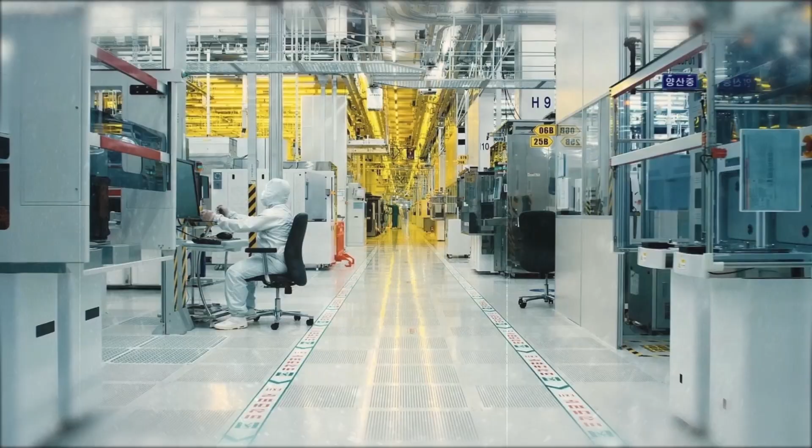Amidst the world's rapidly accelerating changes and competition, what kind of future are you preparing for? We are charting a path to the future through science and technology exchanges, bolstered by international cooperation. In this era, where scientific and technological competitiveness is directly linked to a nation's diplomacy and security, the power to overcome such challenges lies in international cooperation that fosters synergy through collective efforts, and from talents who will shape the forthcoming era.

The scholars of the world are gathering in Korea. A platform that facilitates exchanges between Korean and international scholars, as well as between seasoned and emerging researchers, is taking shape. BrainLink X-Lab Day, organized by the Korean Federation of Science and Technology Societies, aims to be a global hub of talent.

By consistently enhancing and expanding the global talent network, we're laying the groundwork for a brighter future. By inviting global scholars, X-Lab Day provides an opportunity for young Korean researchers to glean insights from the vast knowledge and experience of both Korean and international scholars, as well as to engage in collaborative research.

BrainLink X-Lab Day establishes a global science and technology network among overseas scholars and Korean researchers. In 2022 and 2023, a total of 24 BrainLink X-Lab Day sessions were held in each technical field, with 787 participants, including 161 from overseas and 626 from Korea, building a global human network.

Also, talk concerts, one-day public seminars, were held in collaboration with the 2 nights and 3 days of BrainLink X-Lab Day to enrich their experience.

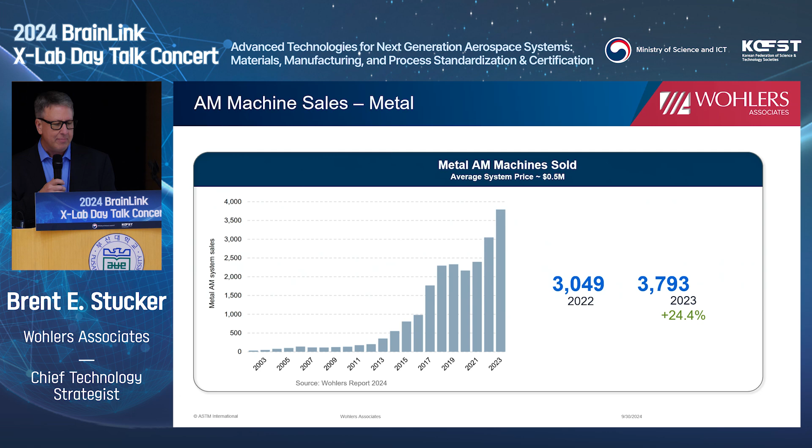If we look at material sales in additive manufacturing, that continues to go up and up, because the more your install base, even if you're not growing it as fast, as long as they're using those machines, they have to consume materials. So materials continue to be a strong area to think about for research and for building businesses.

If you think about the various amounts of material sold, polymer powders still tend to dominate - that's polymer laser sintering primarily. Then you've got filaments for things like material extrusion, FDM type processes, photopolymers, and metals are about the same now. So we have a pretty healthy mix of different materials out there. What's interesting to me is that polymer powders are an area you don't hear a lot about in the research community, because people tend to just use a lot of nylon.

But there is an opportunity - a lot of material goes through all these polymer laser sintering machines or multi-jet fusion machines from HP. It continues to be an area where we need more innovation, and there's actually money to be made. There's quite a bit of money being spent on polymer powders, but not a lot of innovation going on in that area.

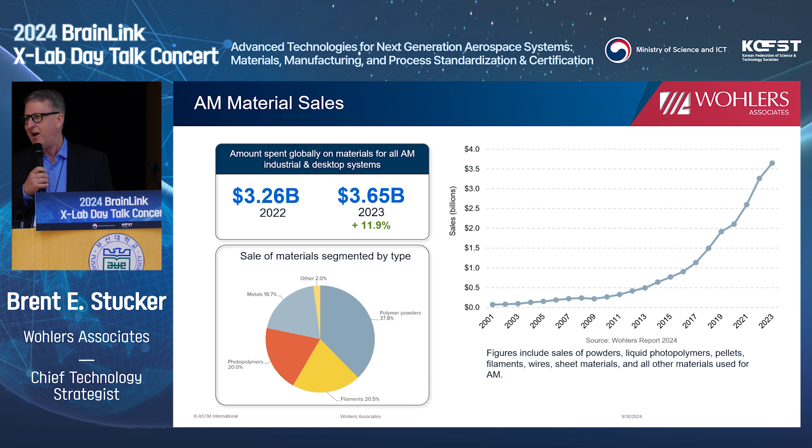Next, I'd like to talk about how people are using all these parts they've been making on additive manufacturing or 3D printing machines. The biggest category is now end-use parts - they're producing components going into aircraft, automobiles, satellites, shoes, or dental applications - though the dental ones are usually molds - and hearing aids.

End-use parts are now almost a third. If you combine that with metal tooling, patterns, jigs and fixtures, you see all those applications are actually producing the thing you want - not using it as a pattern or a prototype. Over the last couple of years, what 3D printing was initially primarily used for - prototyping, getting the right shape, seeing how it looked and felt - we've shifted as an industry where the majority of our revenue is now producing a finished good we want to use. Mostly we use it for the part, but sometimes as a mold or a fixture. It's been a pretty major shift, actually.

That shift occurred right about during COVID, where we went from more prototyping to less prototyping just in the last few years.

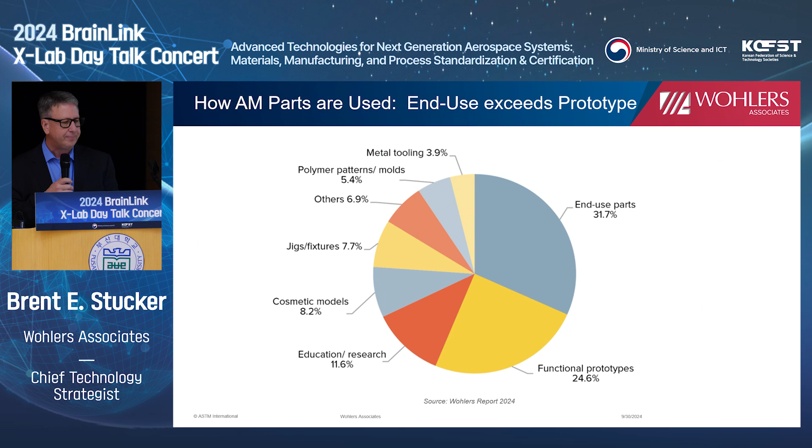Just to give you a little bit of where we're getting this data, we send out a bunch of surveys and work with a lot of service providers. We had over 113 different service providers respond. Service providers mostly build parts for other people, they buy additive manufacturing machines and make parts. We also had over 115 system manufacturers respond to the survey. That's kind of where we get our data, as a collection of that information.

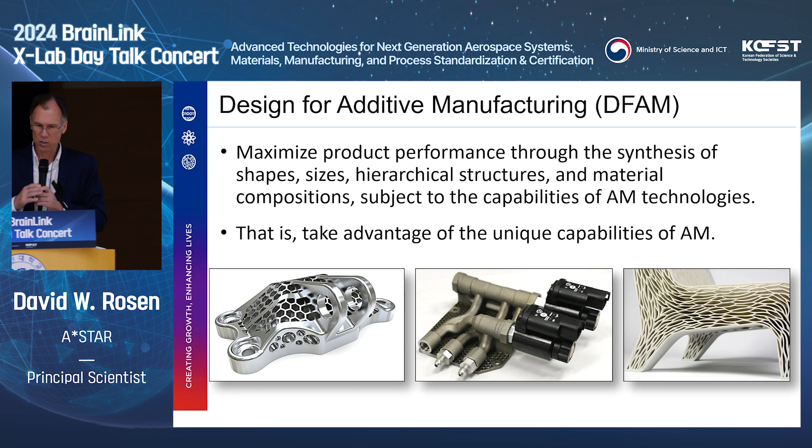So I tend to say we want to take advantage of the unique capabilities of additive. And we need to integrate a lot of different technologies, technology ideas, process ideas, material characteristics, etc. All right, take advantage of the unique capabilities.

So what are they? Well, of course, we can make just about any shape. So shape complexity is the big one here. With additive, you fabricate parts layer by layer, adding and processing material like that. Lasers, if you're using lasers, the laser doesn't care what pattern it's tracing. If you're using an FDM or a material extrusion kind of printer, the nozzle, the extrusion head doesn't really care what kind of pattern you're putting there. So you can make just about any shape.

And because you can do that, you can also make custom shapes. So hearing aids, aligners, dental aligners, dentures, things like that, they can be custom fitted to the particular patient. So shape can be customized, so can material composition in a lot of cases. So material complexity is also possible.

Hierarchical complexity is related to shape complexity. Think of adding tiny little fins or texture to lattice structure to promote heat transfer, for example. And then finally, functional complexity.

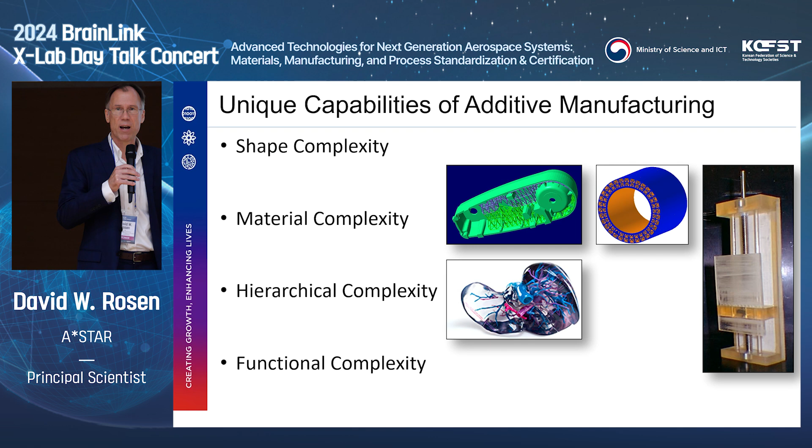In a lot of cases, we can make mechanisms, we can make assemblies right in the machine without post-fabrication assembly. A lot of times we can insert metal components or other kinds of components into the vat or into the powder bed or into the part as you're building it to make functional devices.

All right, so we want to be able to take advantage of that. Dr. Stucker mentioned fuel nozzles of GE engines. There's a picture of one of those. At least that's the picture that GE gives us.

So complex geometries, we can see that's a spinal implant right in the middle. Stryker makes hundreds of thousands of those per year and implants them in people. Hearing aid shells, dental aligners.

You can actually buy American football helmets with vat photopolymerization fabricated foams like that, and those are also custom fitted to the individual player. So we see a lot of examples of complex geometry, custom geometry, designing parts that you can't easily fabricate using conventional technologies.

I like to wrap all this up into some opportunities and some consequences of those opportunities. So again, complex geometry, custom geometry, multiple materials, no tooling, things like that.

So complex geometry, custom geometry, we can do part consolidation. That's one of the real successes of the fuel nozzle from GE. You integrate 19 or 20 parts into one. You save tremendous assembly and welding and brazing costs.

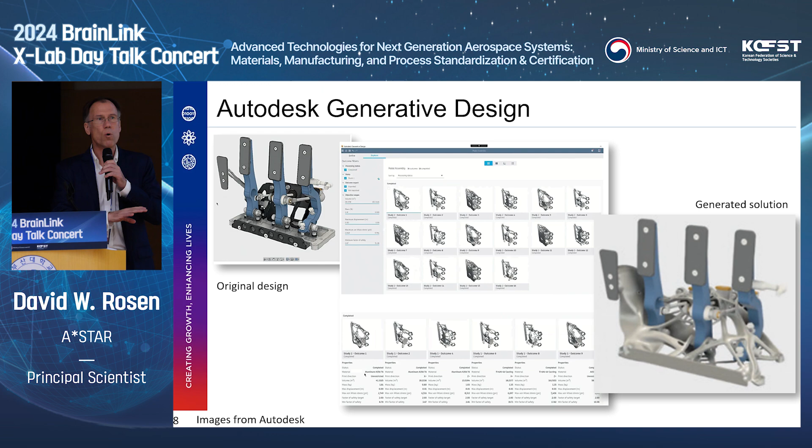Identify a few designs that you want to go further with, and then ultimately settle on one, and do additional engineering work to come up with your final design. This is a really good example of taking advantage of the shape complexity capabilities of additive, but it's only one approach here.

Let me move on and talk about the first of the topics that represents the frontier, which is this whole idea of a manufacturing process chain, not a single manufacturing process, and the need to design for that manufacturing process chain.

In metal additive in particular, you make a part, and for metal powder bed fusion, this is what the part looks like on the build platform with all the other test specimens built along with it. That's not the final part. The final part, in this case a hydraulic manifold, has to interface with standard hydraulic components. There's a heat treatment, you need to remove the support structure, remove the part from the build platform, do finished machining, probably bead blasting—a whole series of manufacturing processes.

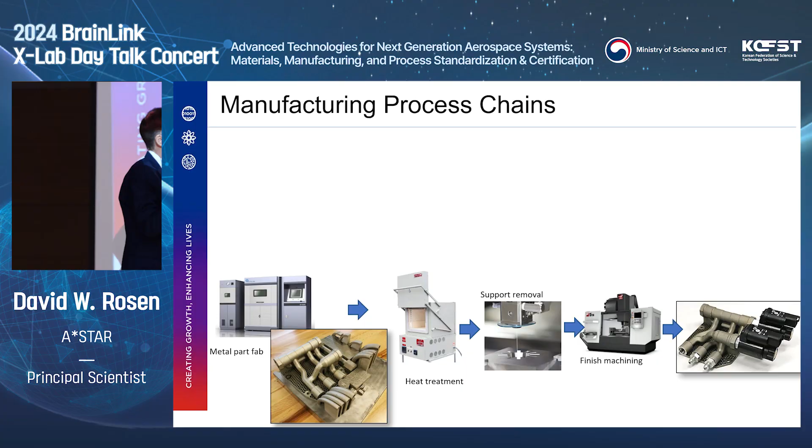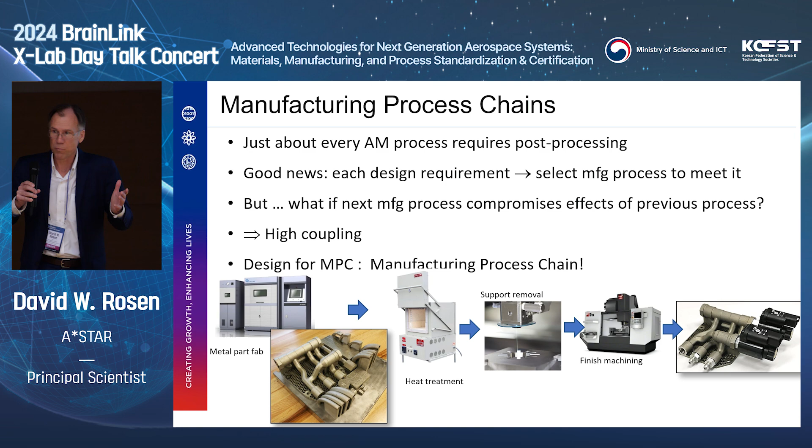So designing for the first process isn't sufficient, because the characteristics of your final part are influenced by all the other manufacturing processes along the way. You want to design for additive, but you've got to design for the whole process chain. Coming up with a process chain is, to some extent, straightforward, but there can be a lot of variations. Some cases you may need additional finishing operations, in some cases you may not. So there's a lot of engineering that goes on there.

From a design for additive standpoint, you need to design for not just the final part characteristics, but really understand what each and every process does to that in-process part, and make sure you're designing the part and the process to give you the characteristics that you want and need.

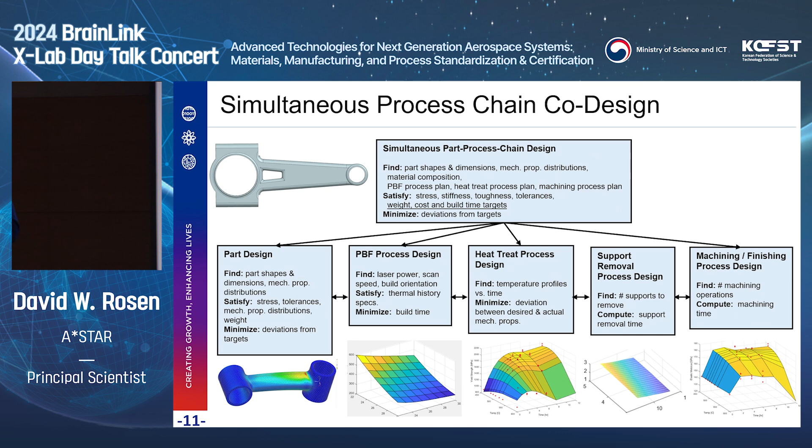So what I'm illustrating here is the formulation of a multi-objective design optimization problem, decomposing that overall problem—design for the process chain—into subsystems, where one subsystem represents the part and all the other subsystems represent the major processes applied to that part. You design the part, but also have to design the powder bed fusion process to get the right mechanical properties. Then you do heat treatment to adjust those properties and get a more homogeneous distribution, remove supports, do finished machining, etc. Each of these processes has to be designed, and you can't compromise functional performance.

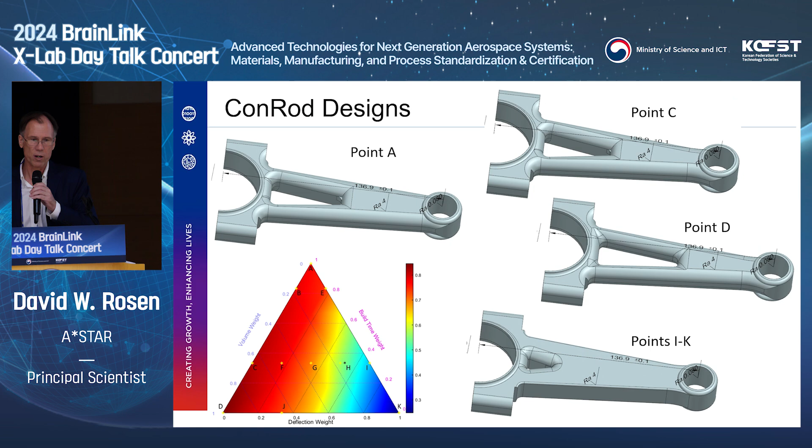We've done a few studies along these lines. This is one example: an automotive connecting rod, showing our approach to what generative design would look like, in the sense that we've defined a design space with both part characteristics and process characteristics, and designed those processes. Different points in our design space represent considerably different designs. They all satisfy the requirements to some extent, but depending on your preferences—do you prefer something really strong and stiff, or lighter weight but less stiff—you get different solutions. We can formulate and solve those big multidisciplinary design optimization problems and help people understand the trade-offs between these processes and the functional requirements.

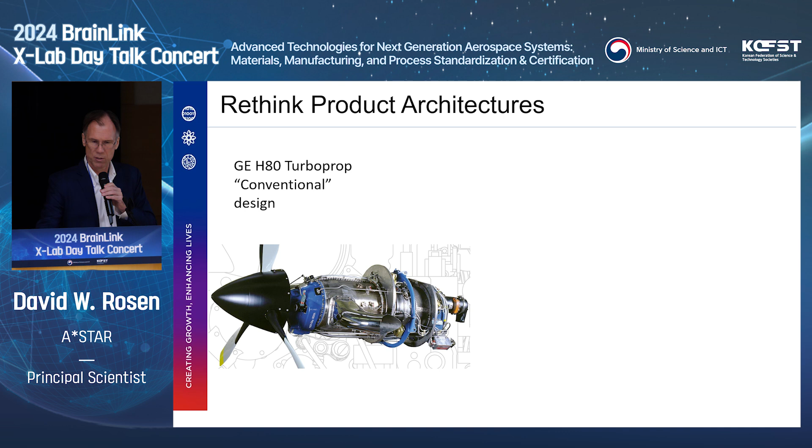Product architecture design—here's another example from the aerospace industry, from GE as well. Here's the conventionally designed turboprop engine, and here's an engine that GE redesigned to make the most use of metal additive that they can. What they claim is that they went from about 850 conventionally manufactured parts down to 11. Now, I see more than 11 parts there, but I think it's the main structures and things like that that count as the 11. So it's a tremendous part consolidation.

Fabricating far, far fewer parts. Each part is going to be much more complex, and that has a huge impact on the factory floor, a huge impact on the supply base, and greatly simplifies the factory floor. Plus you get reduced fuel burn, so better economy, more power, etc. So there's lots and lots of advantages.

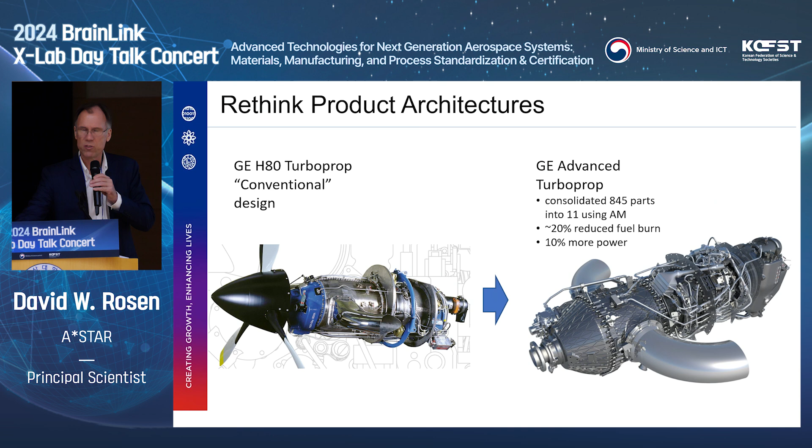But you don't get there by tweaking some dimensions or tweaking designs. You do it by doing clean sheet design—really saying never mind how we've designed and developed engines, what they've looked like in the past. We need to totally rethink these things.

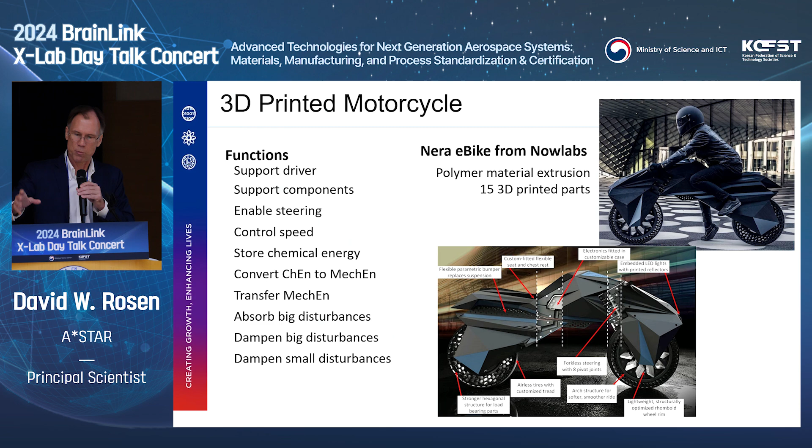Another thing you'll notice is there are no separate suspension components. A typical suspension on a motorcycle is shock absorbers and springs and things like that. But the whole structure deforms, there's also a bumper underneath the seat, and the seat is an elastomer material that's printed. So, not so obvious in terms of this overall suspension, but certainly with a polymer frame there will be some compliance there.

The point is that you can think methodically about the functions and about how you're going to divide up the geometry into different components, into different subsystems, and look for opportunities to do function sharing and function integration. If we can integrate what the transmission does, we eliminate the transmission, and we save a lot in terms of simplifying the overall product architecture.

So we won't go through the details, just this notion that just because something has looked like the motorcycle on the left for 100 years doesn't mean motorcycles have to look like that. In fact, in the context of design for additive, that electric bike consists of, I think, 15 3D printed parts, including the tires, the wheels, the seat, and the frame. So, tremendous change in product architecture.

Assuming I still have some time, the last thing I'll talk about real quickly is 4D printing. I think this is a really interesting area, a lot of possibilities, though still very early in the technology development cycle. 4D printing is basically using the shape memory effect. The fourth dimension, of course, is time, so the shape changes over time.

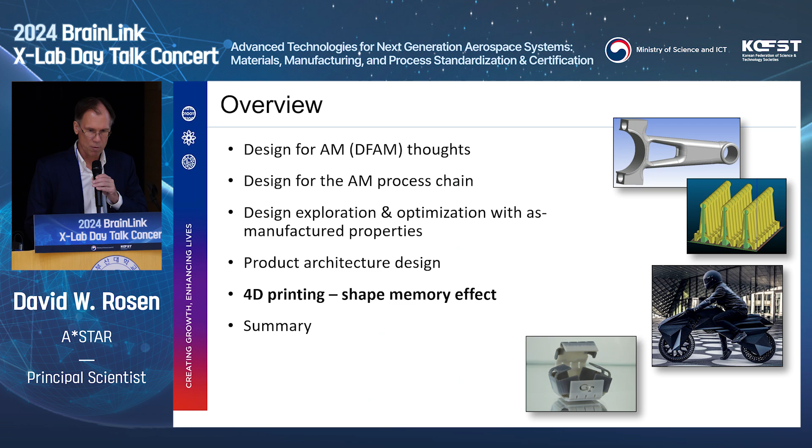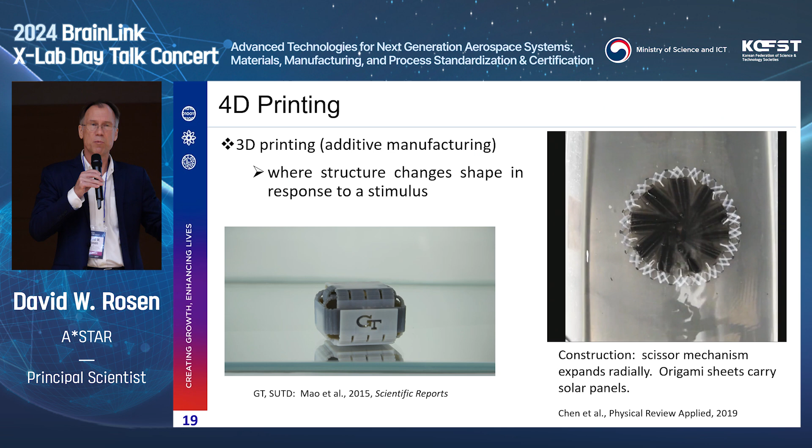In the shape memory effect, a lot of times you use heat as a stimulus. You have a part at room temperature, it has one shape; you heat it up, it changes shape. An example of that, two examples, are shown here. These parts, or a product, are being put into a hot water bath, which stimulates that shape change.

In one case, the part folds up from a flat printed part into a box. In the other, scissor mechanisms are the actuators—the plastic white scissor mechanisms around the periphery—and they open up that solar panel deployment mechanism and unfold the origami solar panel constructions.

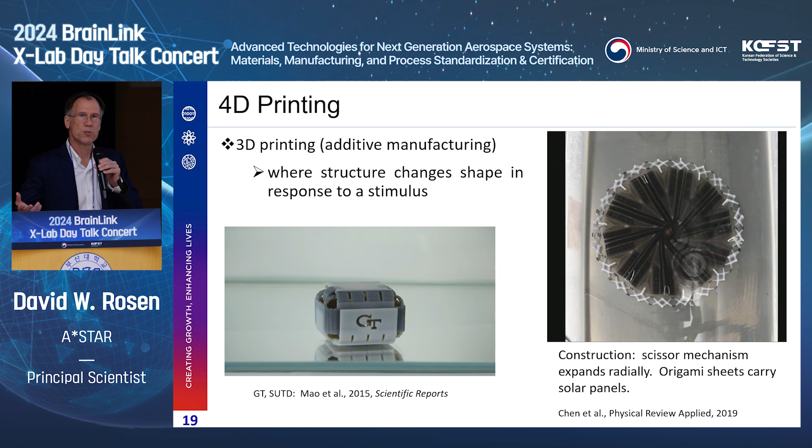And so that's 4D printing in a nutshell, right? You can print in one shape and deploy in a different shape, have things go back and forth. What are the design opportunities? In my mind, this is the big picture: these are essentially solid state actuators. You can print them, and they can power mechanisms that deploy, that change shape, etc.

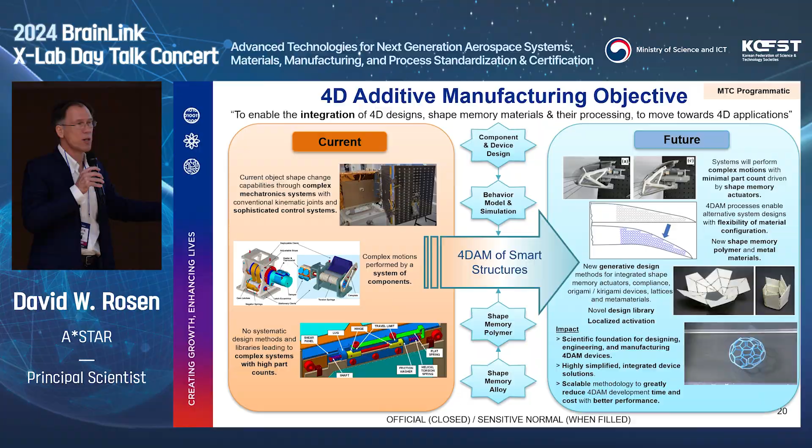How do you implement those sorts of functionalities conventionally? Well, they're called mechatronic systems—using a lot of servo motors, servo motor controllers, a lot of sensors, shafts, bushings, bearings, washers, fasteners, and things like that. Many of those components can be eliminated if you can design good shape memory actuators. I won't go through all the details, but that's kind of the story there.

So we now have a new project at A*STAR in Singapore on 4D printing, and a big part of that is design for 4D printing. The idea is to make progress toward using the shape memory effect to develop actuators for systems that deploy and change shape. We can think about all these different components that people have developed over the years, and put those components together in novel ways to do very different deployment and morphing or shape change activities.

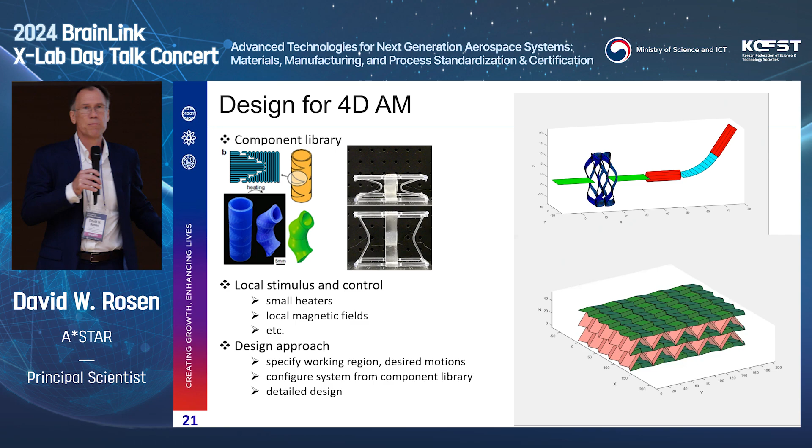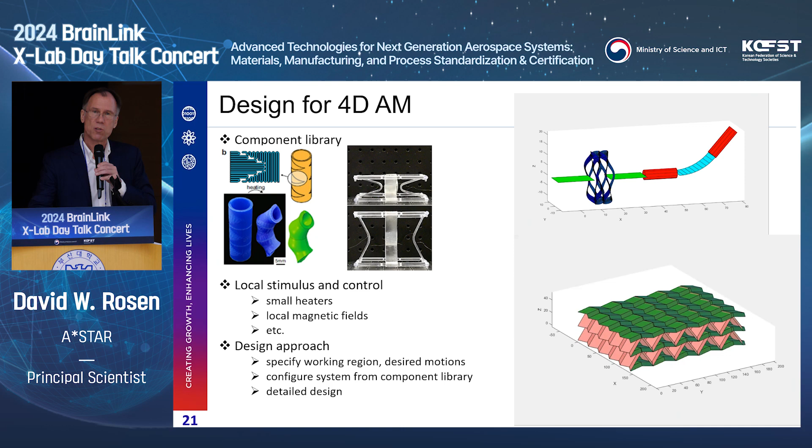So up on the top there is just something that deploys, it extends, it bends, and down here is an origami construct that changes shape, just to give you an idea that you can get a lot of different kinds of constructs, put them together in different ways, and achieve functionalities that really haven't been explored before, haven't had the ability to explore.

So I'll wrap up here. Summary: I wanted to introduce this notion of design for additive manufacturing as an opportunistic design process, not just this kind of constrained, restrictive process of tweaking things. Designing for the additive manufacturing process chain is a very important consideration, and there are good ways to establish that process chain and then design the part and the product for it.

I talked about rethinking product architectures, essentially thinking of new ways of organizing the way products are built and thought of. And then finally, I introduced design for 4D printing, and tried to identify some challenges and opportunities in each of those areas. Hope you found that interesting, and that'll conclude my talk. Thank you for your attention.

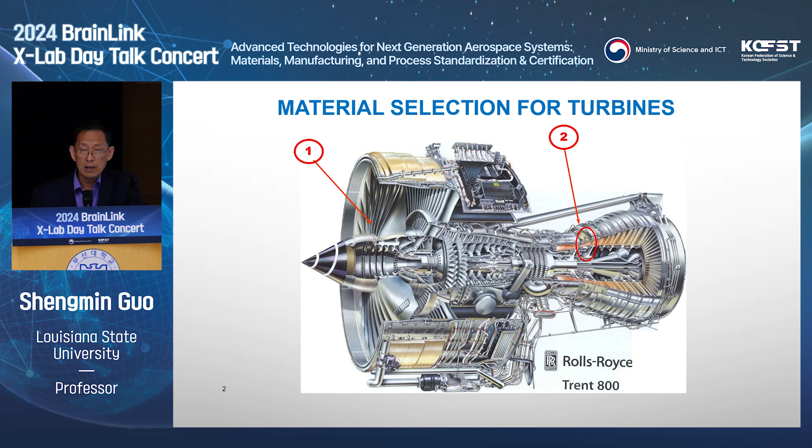For aerospace application, it's very important to consider both material design, fabrication, and the thermofluid cooling technique. So typically for the high pressure turbine blade, you can see it right here. There are several technologies. Material development is one thing. Over the years we've had the development of super alloys, and now you can find a single crystal blade - the entire blade made of single crystal, nickel-based super alloy.

But even with nickel-based super alloy material, it will not survive jet engine working conditions because the temperature is so high. Nickel-based super alloy single crystal will melt and lose mechanical strength very quickly. So what you'll find, in order to safeguard jet engine components, is that you have to add a ceramic layer on the surface to provide a so-called thermal barrier coating. And inside, we have to think of introducing cooling jets, using cooling gas to provide cooling, to make sure all the engine hardware doesn't exceed the allowed temperature.

The nickel-based super alloy, even the single crystal one, has a maximum temperature probably less than 1,000 degrees C. That apparently is not hot enough to operate a jet engine. So the idea is: near the wall, make sure the temperature is at or below 1,000 degrees C; away from the wall, you want the temperature as high as possible. Jet engine components are made of very expensive material.

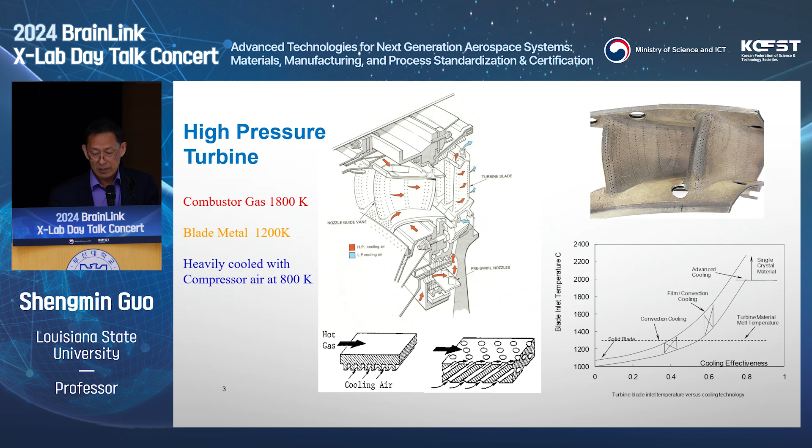At the moment, you may find that metal-based 3D printing people are talking about doing repair work. I really don't see the immediate application of using 3D printing to fabricate the entire high-pressure turbine blades, because with turbine blades you have to make sure the growth of the grain along a certain direction gives you the maximum strength.

For temperature control, I want to find out what's the temperature distribution in the engineering part we are going to fabricate, including 3D printed parts. In order to find the temperature distribution, you need to understand the flow condition. For example, for the engine components, find out what is the hot gas temperature, find out what is the heat transfer coefficient for the high-speed flow around the jet engine components. You also need to know inside the cooling gas, what's the pressure, what's the temperature, what's the heat transfer coefficient, etc. Is that enough? No.

We still need additional information. We need to find out what's the thermal property of the material you're going to use to form the jet engine components. Let's say the engine blade is made of nickel-based superalloy. What's the thermal diffusivity, thermal conductivity, those basic thermal properties. And on the surface of the nickel-based superalloy will be coated with a ceramic layer, let's say to stabilized zirconia. And then that's a question, what's the thermal properties for those ceramic layers?

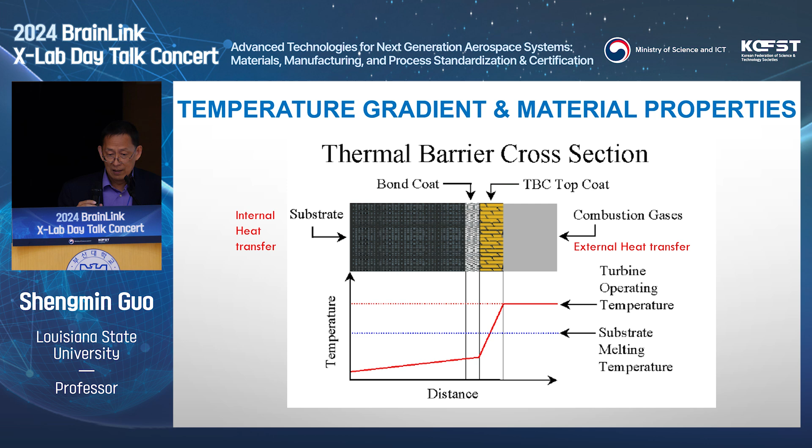Therefore, you have to understand all those thermal properties to enable you to predict what's the final temperature distribution inside a very simple, I'm saying very simple, jet engine, let's say first stage nozzle guide vane, or the first stage turbine blade. Talking about the fabrication, because the topic today is on the materials, additive manufacturing, and the thermal properties.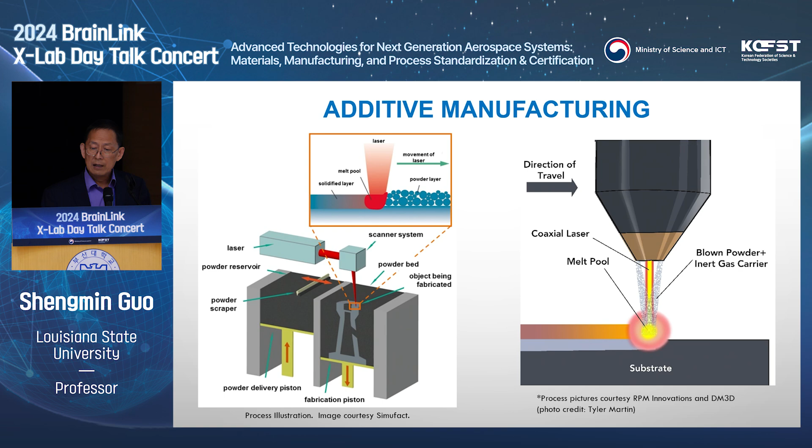For metal-based additive manufacturing, laser powder bed on the left-hand side and direct energy deposition on the right-hand side are very common fabrication technologies. And in fact, I have long-term collaboration with NASA. Look at all those components NASA already fabricated using additive manufacturing for the propulsion application. You see the nozzles.

NASA did a fire test. I assume, look at the color, you will know the temperature probably over 1,200 degrees C, just look at the color of the material. Ask yourself, what material to use to fabricate it, and how are you going to safeguard your entire rocket engine operate under such high temperature, under such high load.

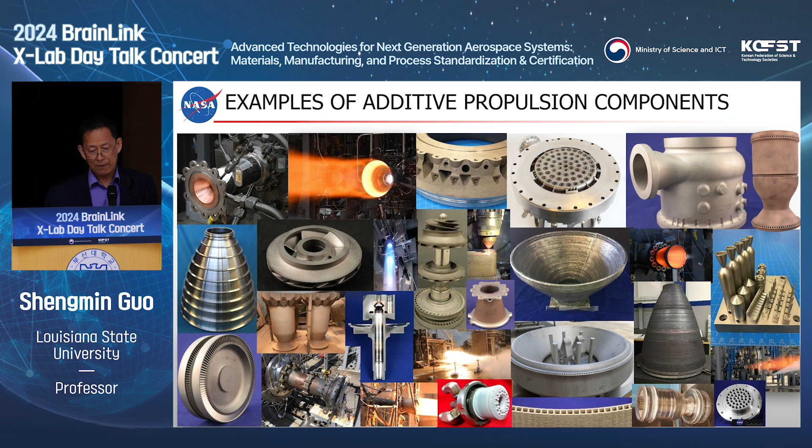For the last few years, I tested different 3D printed materials supplied by NASA. We wrote a book together several years back, called Metal Additive Manufacturing for Propulsion Applications. My group contributed to the thermal property measurements you will find in the appendix of that book. So just to show you a list of materials we tested, pretty much every single material NASA applied additive manufacturing to, they send the material to my lab. We will find out what's the thermal conductivity, thermal diffusivity as a function of temperature. We are going to test those 3D printed materials' thermal properties all the way to the working temperature, not just from room temperature.

Very strange, look at the rocket engine combustor and the nozzle. Look at the right-hand side, that's a 3D printed rocket engine nozzle. Inside the combustor, you burn the fuel with air, let's say hydrogen reacting with oxygen, will generate a temperature maybe over 2,000 degrees C. What kind of material are you going to use to safeguard the structure of the rocket engine nozzle and the combustor chamber? Definitely nickel-based superalloy will not be adequate.

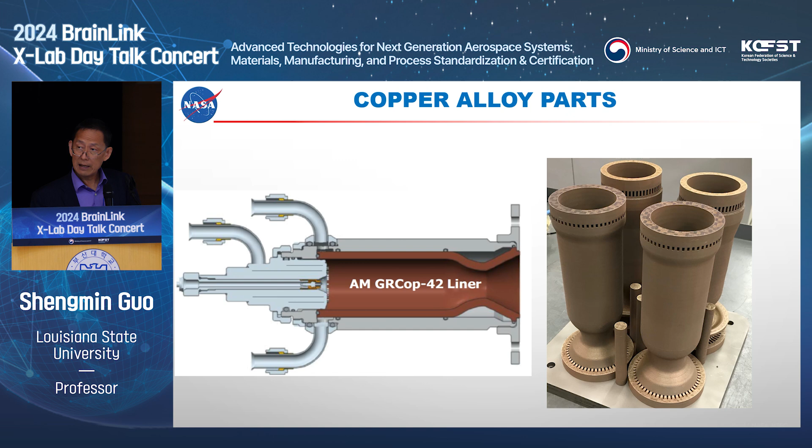My contribution in that book published by NASA is to obtain all those thermal properties of AM parts working over different temperature ranges. Look at pure copper—it gives you the highest thermal conductivity, so it can take heat away.

However, pure copper is not strong enough. When you heat it up to a slightly elevated temperature, the copper will lose strength.

The goal of this NASA copper alloy GRCop-42/84 design is to find copper alloys that give good mechanical strength at elevated temperatures. We know the melting point of copper is around 1000 degrees C. Nobody can operate there because it will melt. Pure copper, when heated, becomes very soft and won't sustain the high pressure inside the combustor.

You may ask, how about adding alloy elements to make it stronger? Yes, NASA thought about this many years ago. For example, one copper alloy is 99.8% pure copper plus maybe 0.1 to 0.2% zirconium. That sounds like a good option, giving good thermal conductivity, but the mechanical strength is not good enough.

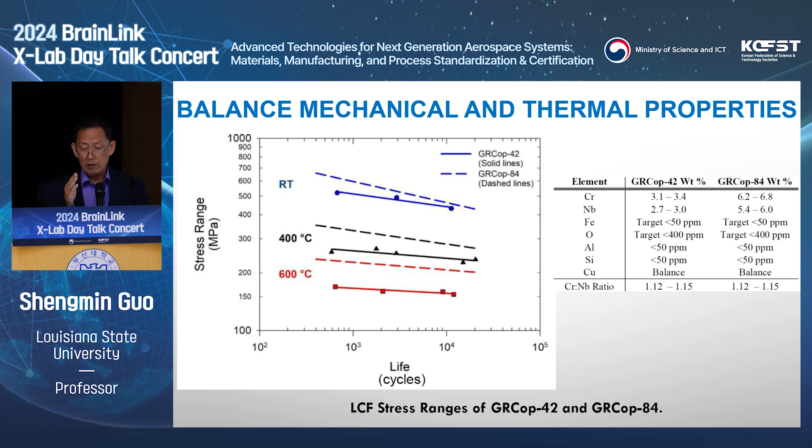Due to the selection of material utilizing additive manufacturing technology, we can incorporate a very complex cooling design into your parts. That's the message I want to pass on today.

Well, somehow this video won't play. Okay, I guess we want to play.

I will stop here. The conclusion is: when you design for additive manufacturing, select your material properly, consider your engineering application, the required temperature range, and the required stress level. Additive manufacturing will then enable you to implement very complex designs into your part, including cooling configurations for engineering applications.

Of course, more studies need to be applied to AM parts because you're using a new alloy. For example, NASA wants to find out, for GRCop-42 or 84, whether the 3D printed part gives the same mechanical or thermal property as parts fabricated by conventional methods like forging or extrusion. They want to see the difference because 3D printing, especially laser powder bed and direct energy deposition, gives a very fast cooling rate, resulting in a unique microstructure.

Those unique microstructures very likely will impact the thermophysical properties—thermal conductivity, diffusivity. They are a strong function of microstructure. Once you change the microstructure, the thermal properties will change as well.

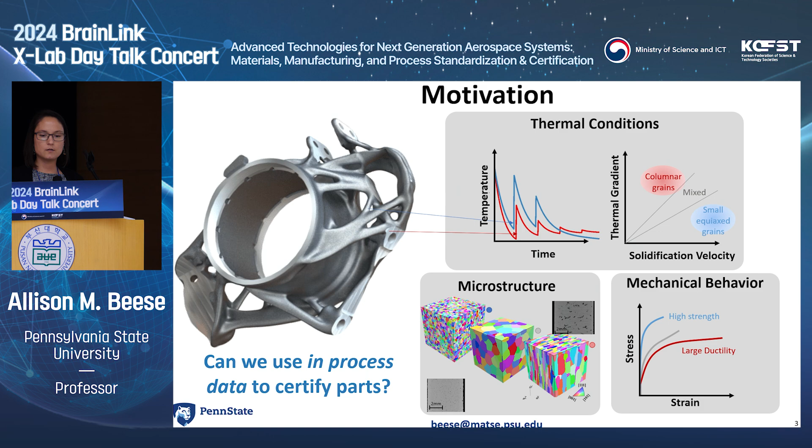And the idea here is that we would not intentionally process in these different regimes, but depending on the design of our component, we may enter one of these thermal conditions. So we want to understand: are there things that we can do during the process that we could recognize that we've gone into one of these regions?

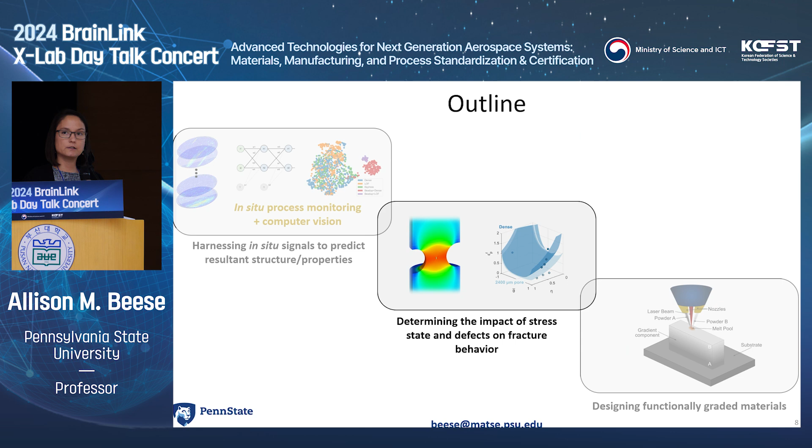Okay, so that was for uniaxial tension, but in actual additive manufacturing, we're interested in complex shaped components. So I'm going to talk about what if we have complex shaped components - how do we predict failure in these parts? These are a number of different geometries we could see, where I'm just going to describe two things to get us on the same page in terms of stress state.

We can define our stress state as our stress triaxiality, which is just the negative pressure of our stress state. So if we have a high stress triaxiality, it's going to want to pull open pores in our sample. And our normalized Lode angle parameter theta bar tells us about the second principal stress. It's a little convoluted, but it tells us the importance of shear, for example.

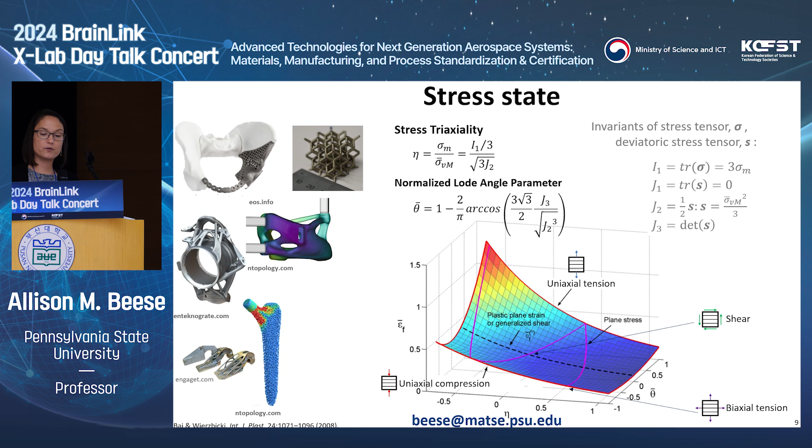The reason I bring these up is that for ductile metals, the amount of ductility that we have, the vertical axis in this plot, is a function of those two parameters. So for any combination of these two, we can have a very low ductility over here, or a higher ductility over here. The distance between your bottom plane and this surface, this fracture locus, tells you the amount of ductility in that stress state.

So the idea is for additive manufacturing, if we have these complex shaped components that are accessing lots of different stress states, we want to know how much ductility we have in each of those to know how far we are away from failure.

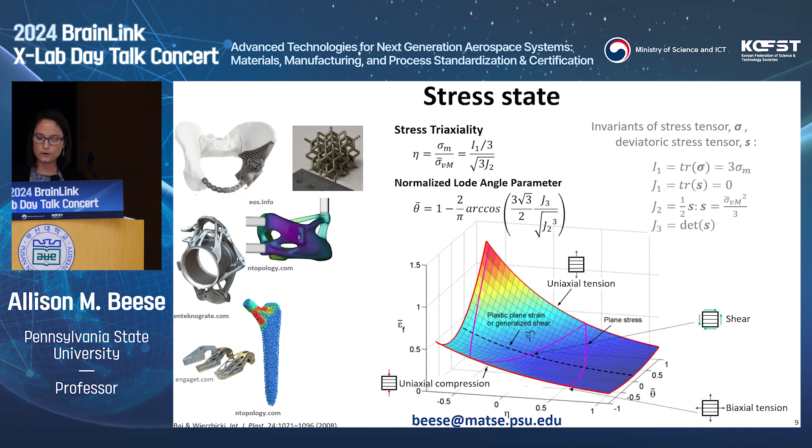So we do this as a two-step process where we fabricate samples and first study the plasticity behavior, then the fracture behavior. In both cases, we use a number of experiments, we develop models, and we calibrate those models so we can understand how the material deforms and fails.

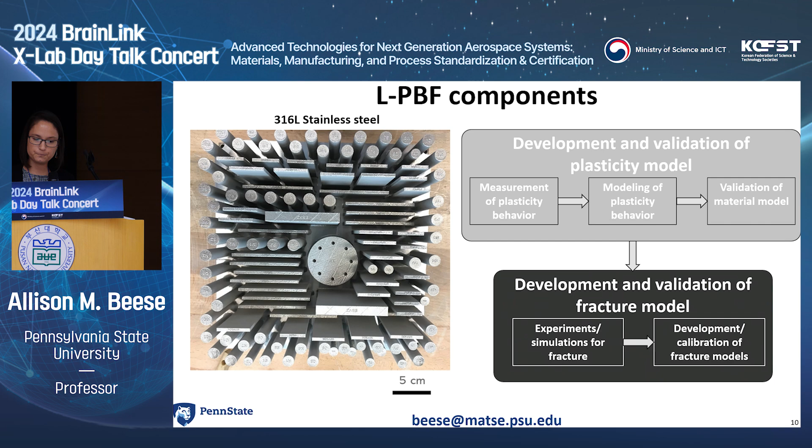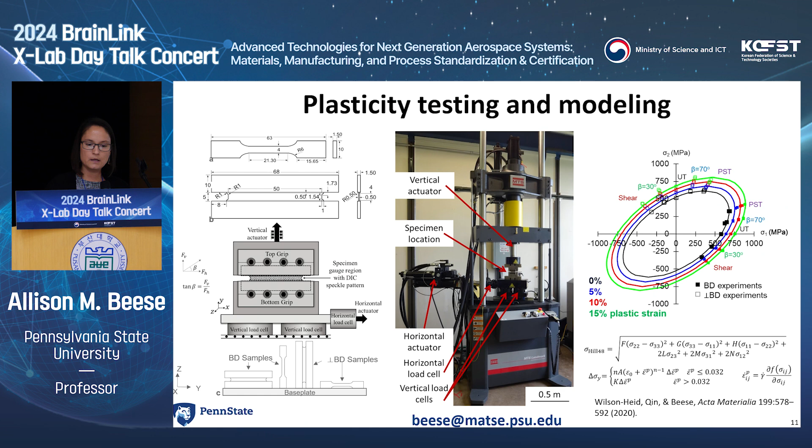The next thing then is to say, well, what about how it fails? When we think about failure, there are some experimental techniques we'll apply so that we can understand the failure behavior.

The other thing we wanted to look at is, well, what about if we have defects? A big concern would be, okay, if I find a defect in one of my additively manufactured parts, do I need to throw it out, or can I still use it? What are the implications of this?

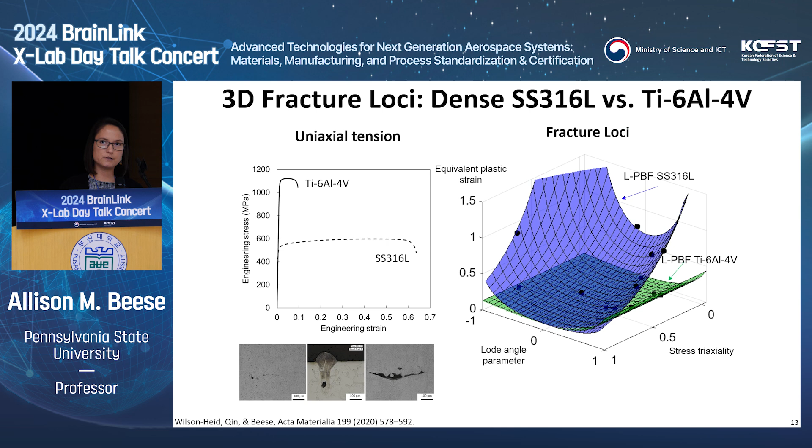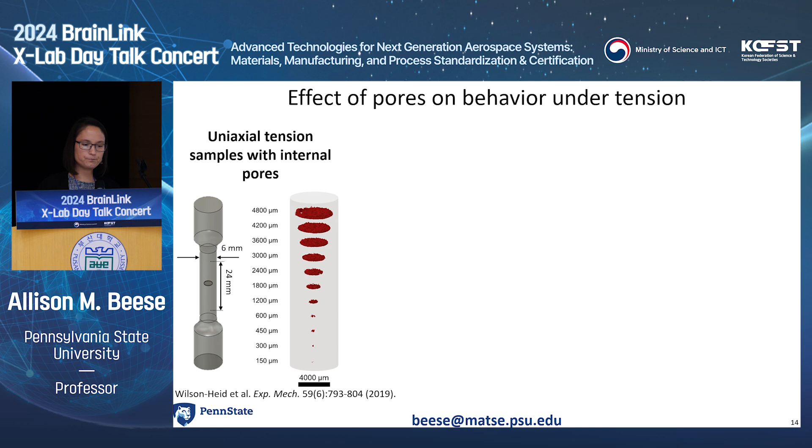So to study that, we've fabricated samples that have intentional defects within them. We fabricate tensile samples, for example, with a single pore at the center, with a wide range of sizes, where we're interested in the relative size of that pore. And then we can see how our stress strain curves are impacted by those defects.

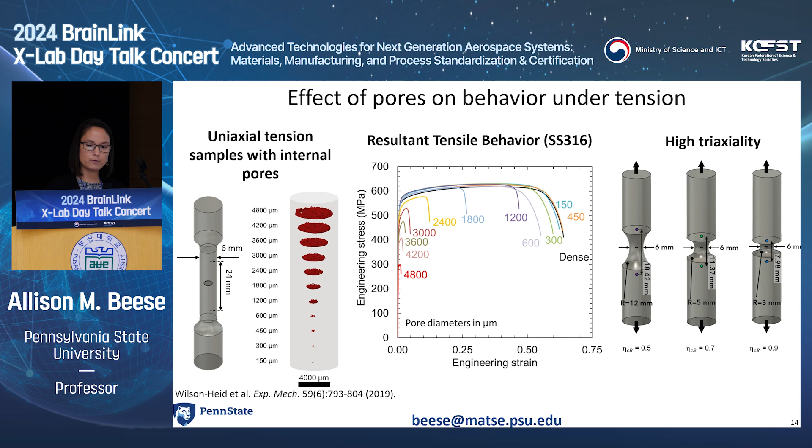So if I want to place this in context with what we just spoke about, we have our 3D fracture locus, strain to failure as a function of those two parameters. What we're looking at here for these round specimens is just this right-hand side, so Lode angle parameter of 1. That's just pulled out here.

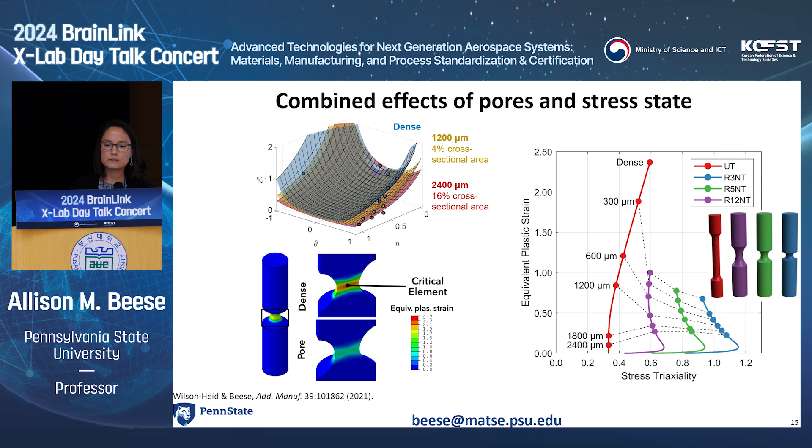So how do we use this? The way that we use this now is if we think about a complex component made by additive manufacturing, we can subject it to certain loads and we can do the finite element analyses to show what our plots of stress and strain would be, but we can't just predict where that's going to fail.

We need more information. So we can plot out our stress state at every location, and we can go back to now our fracture locus that we just developed. If we take a look at this blue one, we can say for every point, we have a unique location of our theta bar eta, so we have a different location here, and we have some stress and strain that we've reached. We want to know how far am I from my fracture surface.

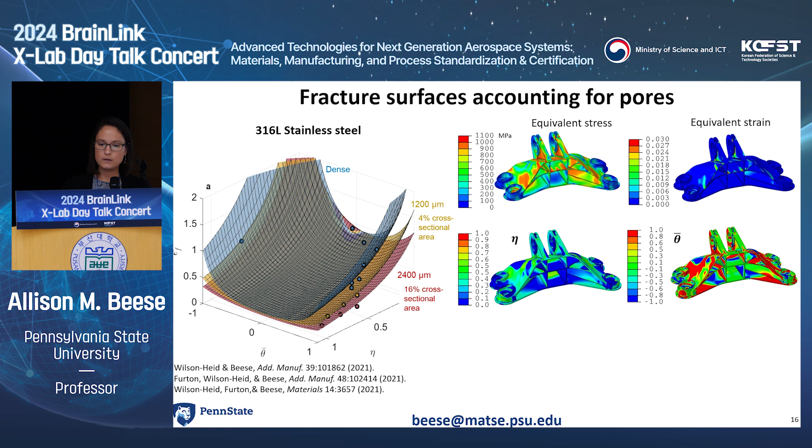And if I'm really far away, we're going to say that damage is 0. If I'm right on that fracture locus where I'm going to fail, damage is 1. So what do those contours look like? This is what these look like.

So most of our material is very far away from failure, it's blue, and some of it up here is very close to failure, it's red. That would tell us in this particular design, we would have to change our design to avoid failure. Depending on whatever safety factor we were interested in, we could adjust our design accordingly.

The other thing we can do with this, the powerful thing, is we can say, what if we do have defects in our material? How critical are they? So we could say, I want to assume that I have defects that take up a certain size, maybe this yellow surface here. And we would say, how far away from that surface am I at every location? In this case now we see that there are a few more places that light up in red, meaning that we would be close to failure if we had pores of that size.

This tells us then we can take a look at a material and a design, and we could adjust and say, what are the areas that I really need to inspect for pores and of what size? And then do I need to redesign this material at all to actually use it?

So this is the thing about this, now we have this method that allows us to determine the impact of defects and stress state on fracture. We know the ductility based on these things. And it also gives us a guide for non-destructive part evaluation. It tells us where we need to look for defects, and it also tells us the criticality of the defects found. And we can flip it to say, what is the critical size of defect I have at every point in my material, and look for that as well.

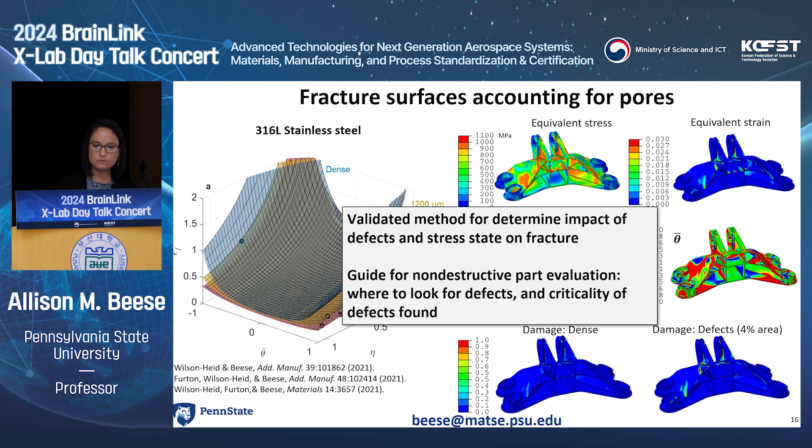In the last few minutes, I'll talk about functionally graded materials, where we want to think about putting different properties at different locations within a complex component by changing the chemistry. This is an example schematic to show, if these colors represented things like thermal conductivity or stiffness or magnetic permeability, we could get different properties at different locations by putting different materials in different locations.

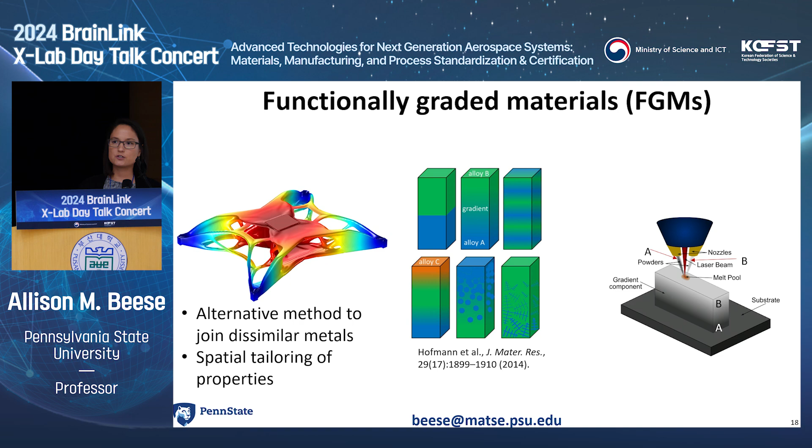So we can use this to join dissimilar metals or tailor properties, and for this we use directed energy deposition and deposit different materials from different hoppers as a function of position.

We've worked in this area for a while, and we were initially given a number of samples from NASA's Jet Propulsion Lab where they had graded between well-known alloys without sort of a design aspect. The idea here was, if you just blend well-known alloys, you're going to end up with cracking and failure due to the fact that you have intermetallics present.

So our goal then was to say, how do we make sure that we can get from one composition to another composition without failure? The initial approach that we came up with was this, I'll denote as a feasibility diagram for deleterious phases, where we said, everything that we'd looked at in those previous samples showed that we could predict the phases if we looked at two extremes: equilibrium and then Scheil solidification.

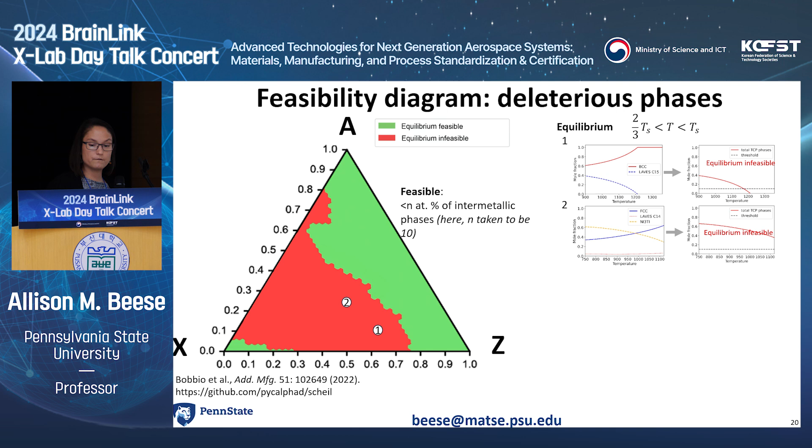So what we're going to look at here is a ternary element space where we could say that a composition is feasible if we have under a certain amount of intermetallic phase. That's a user-defined value, and here we'll take that to be 10 atomic percent. If we take a look at equilibrium, which is relevant if we think about heat treatments after processing, or even some of the repeated thermal cycles we see in additive manufacturing, we can then take a look at every composition and see if it's feasible or infeasible, meaning it has under or over 10% of intermetallic phases.

And we do the same thing for Scheil. Scheil is saying we have rapid solidification - what are our solidification products? We stack those two together because those are our two extreme bounds. And we would say that we would only be interested in exploring this green space where we have a lack of intermetallics.

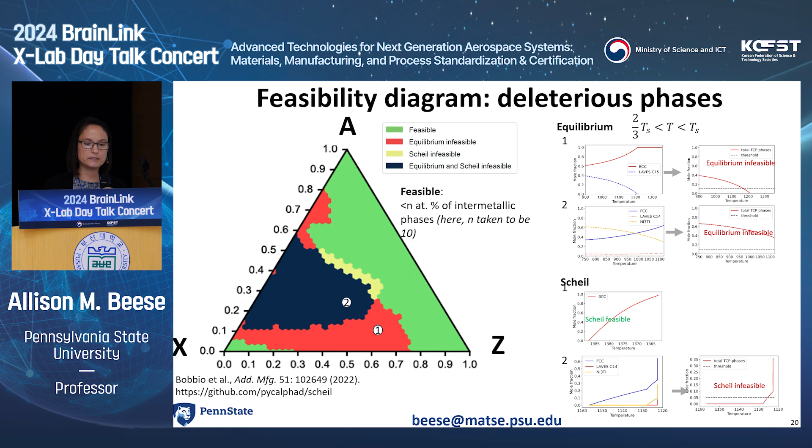So to demonstrate this, we looked at this for grading a stainless steel to a Ti-6-4. We take this simplified material system, and we can plot out all of the possible feasibility diagrams as shown here. So these are all of the diagrams, ternaries for that particular system.

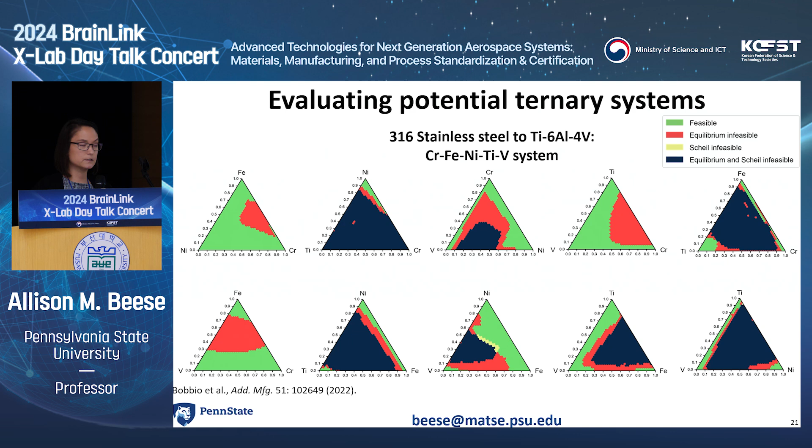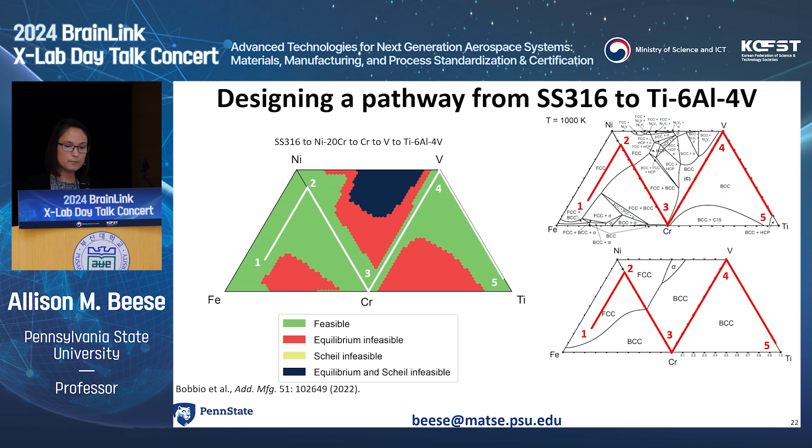There's actually only one way that we can put those together, like a puzzle, to get from stainless steel to Ti-6-4, and that's shown here. This tells us we could go from stainless steel to nickel chrome to vanadium to titanium, and equilibrium and Scheil predict that we will transition from FCC to BCC. So we're avoiding the intermetallic phase formation by introducing lots of intermediate steps.

This was fabricated by Ames Lab. It wasn't optimized in terms of processing parameters, but what we were interested in was whether the phases actually transition as anticipated, meaning do we go from FCC, as equilibrium and Scheil predict, to BCC as both predict.

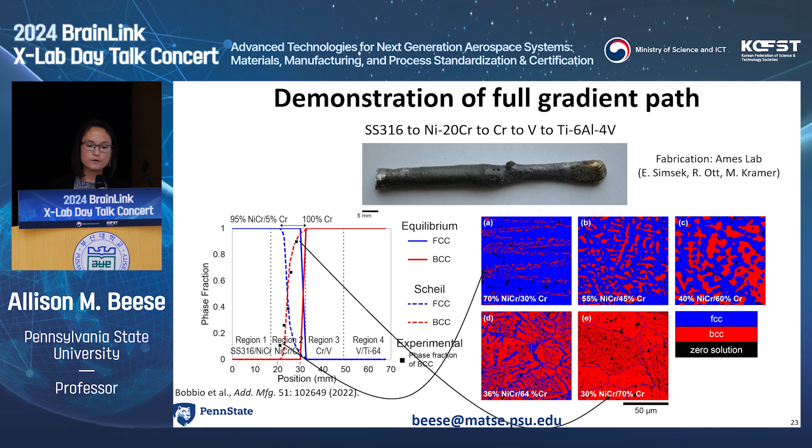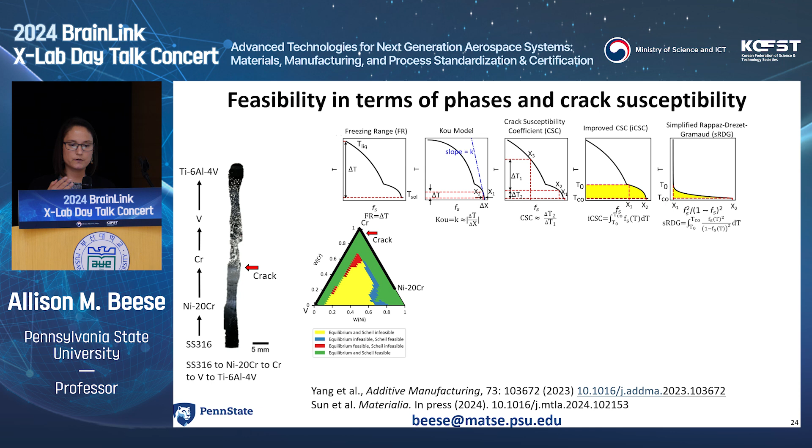We saw that we very well followed the Scheil predictions. However, this was good in terms of avoiding intermetallic phases, but we did still have cracking when the chrome was introduced, up in this corner here. So we also now have integrated welding solidification crack susceptibility criteria, where each of these five criteria are different methods to say whether or not you expect a crack during solidification. Each of these are on different scales, but if we normalize these and plot them, we can see that each has a hot spot where chrome is introduced.

That would be represented by a dark region in our crack susceptibility map. So we can now merge these two techniques together and say, okay, we have a map that tells us where to avoid compositions based on intermetallic phases. Those are the colors, and then the grayscale on top of that would tell us regions to avoid if we want to avoid solidification cracking, or things that we'd need to modify in our processing parameters.

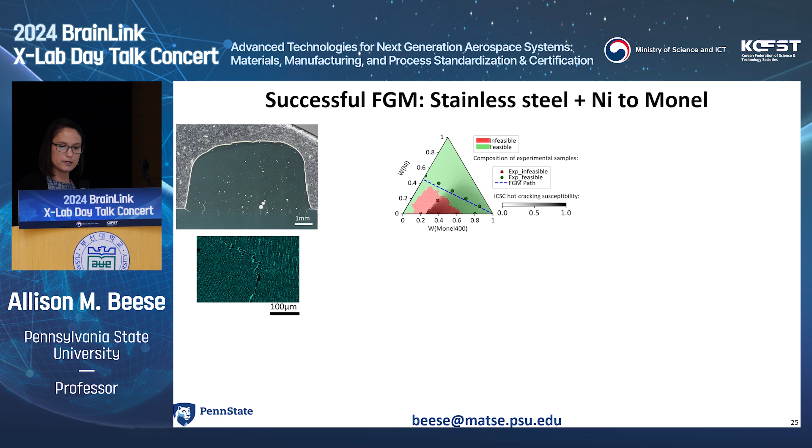So we've used that to successfully grade stainless steel to Monel. If you try to merge these two directly, you'll get cracking due to copper segregation. But if we add in some nickel to avoid the crack susceptibility region, we're able to successfully grade between those two components.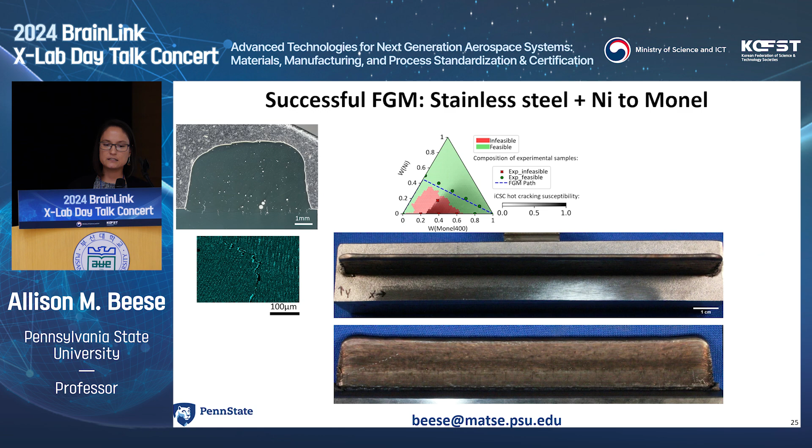One final thing I want to comment on: if we think about these paths, we have some tools now to decide whether something's feasible or infeasible, or assign different penalties for different compositions. We can also think of this in terms of what tools we can use to get from one point to another. So in 2D or 3D, we're representing the compositions as nodes and their connections as how we can get from one to the other.

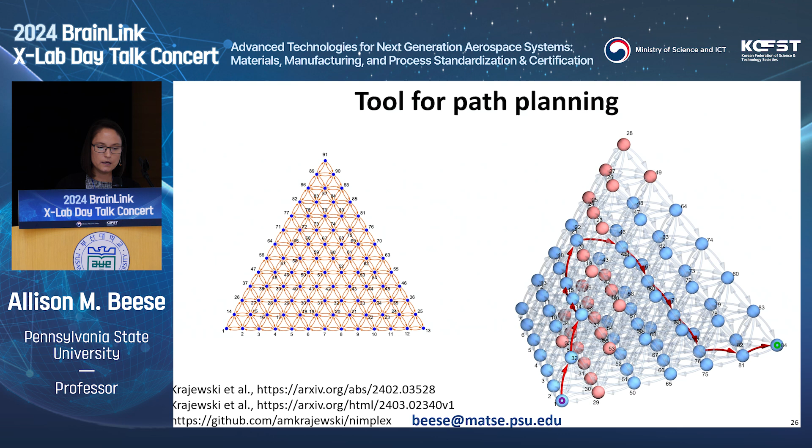This is a tool that was developed by a former graduate student, Adam Krajewski, where if we take a look, we've merged that path planning with our feasibility diagrams. We have the feasible space in green and red is infeasible. We can start to think about how to get from one composition to another, either with the shortest path, or we can stretch space to minimize the selected gradient.

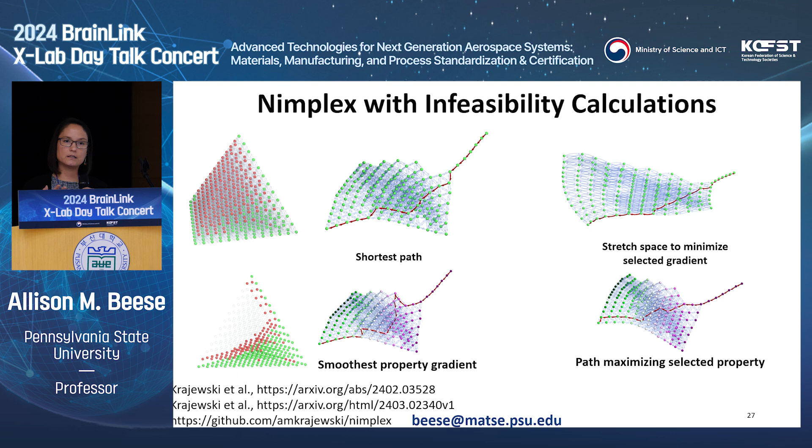And if we assign properties now to these different nodes, we can say that we want the smoothest property, or a path maximizing a selected property, and so forth. So there's lots of different things that we can now integrate into this approach, which generally allows us to go from one composition to another.

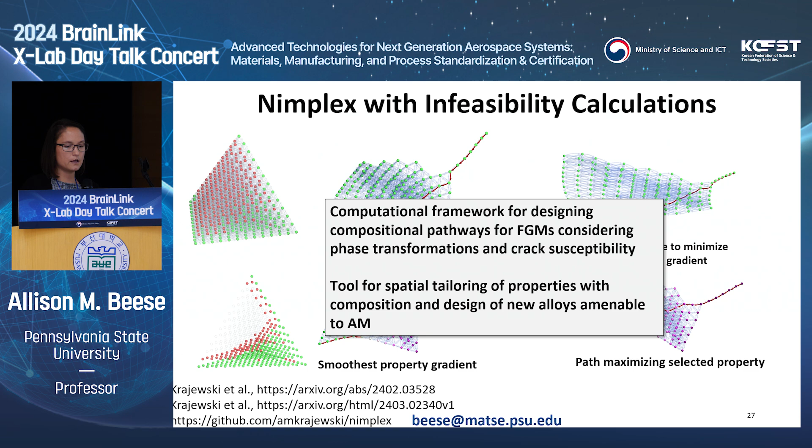So in summary, we've designed a computational framework that allows us to find compositional pathways for functionally graded materials, to avoid cracking due to phases as well as crack susceptibility. This provides us tools for spatially tailoring properties, but it also gives us a path for designing new alloys amenable to AM. The three parts here are summarized.

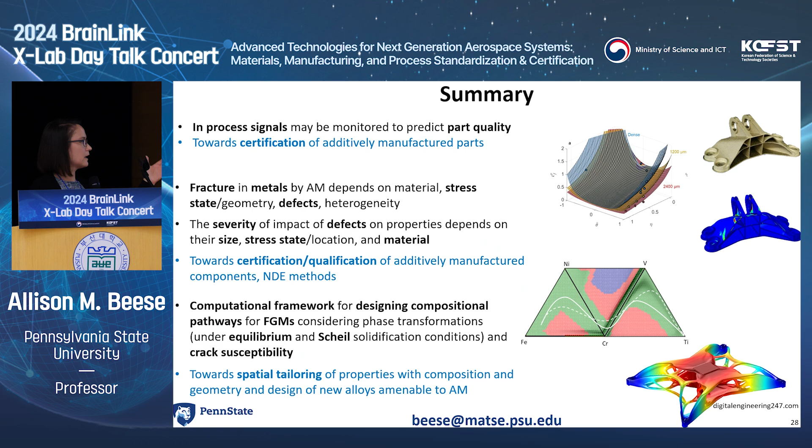The first is thinking about certification of additively manufactured parts by harnessing in situ process data. The second is thinking about stress state and defects, and defining critical defects to avoid so that we can use a part in service. And the last one is looking at functionally graded materials. So that's all for today. Thank you.

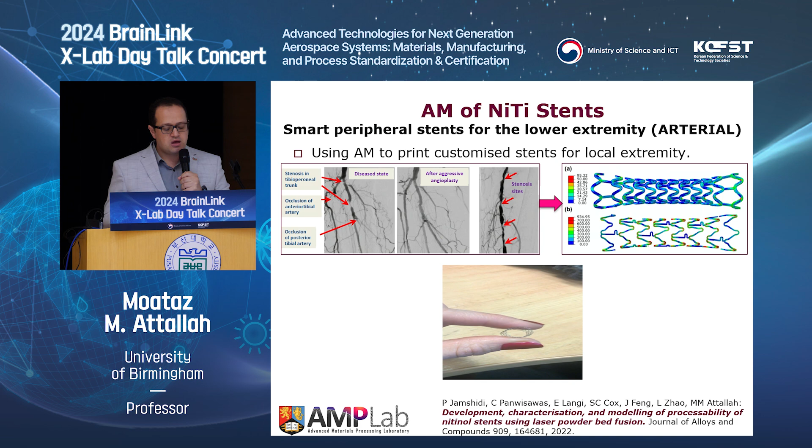To get from the concept to the application, we obviously saw some technical challenges. The first technical challenge was the surface finish, the quality of the part we're trying to make. So if you look into the as-printed stent, this is how it looks like.

So the top there, that's the as-printed stent. It had to go through a long process of surface finishing and electropolishing to get to the nice, shiny looking stent surface. If you see this under the SEM, you'll find how an as-built stent looks like, around 0.5 mil on this scale bar. After etching, it reached the right geometry of around 80 microns, which is what you want for a nice bendable, flexible stent.

The other key problem we had was that if you try to print nitinol, which is meant to be 50-50 nickel titanium, you end up getting some nickel evaporation. Nickel will selectively evaporate. So we worked with our colleagues at Oxford University back then to simulate the effect of the process parameters on the evaporation, so you know roughly what scan speed and laser power will generate how much nickel evaporation.

We simulated that by computational fluid dynamics. As an outcome, we know how much nickel is being lost, and we can add more into the alloy at the start. So instead of printing a 50-50 nickel titanium, we print 55 nickel, 45 titanium, to account for the loss that happens in the nickel during the process.

That all worked, and we proposed the idea. Then interestingly, during the project, Johnson Matthey, who was one of the partners, came to us and said, we probably have a better idea for you than just printing the stents.

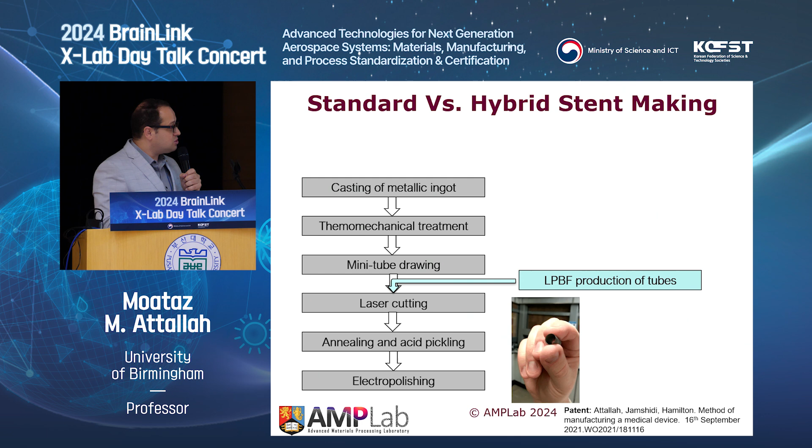Their idea was, why don't we just simply print for us tubes? Forget about printing stents, print the raw material of the stent manufacturing process. If we avoid all of these processes of casting, thermomechanical treatment, drawing, and straight away make the tubes. We liked the idea, so we said fine, we're going to try it. We filed a patent for it in 2021, and we've done the proof of concept of the idea.

So essentially, we looked into making a tube from nitinol. We get the tubes, we get them laser micro machined. This is how a stent looks like. You can obviously make a variable diameter tube, you don't have to make a perfect tube. You can customize it to the shape of the arteries that you're trying to open up. And eventually you get the stent made. It can be used as a commercial stent.

The outcome was quite good. Shapes were quite nice, you can get into the right shapes. We have done the qualification for the stents based on the ASTM standards, obviously, looking into the bending of the stents by simulation and by testing and so on.

But still, that failed to leave the lab. So we initially thought that we could make this technology and commercialize it as being something like a custom medical device, so essentially you can apply for a waiver or an exemption to manufacture it. But we've still realized that we still have to go through a very tedious medical qualification process, even though it's meant to be a custom device.

In the UK, at least, you have to go through ex vivo trials, animal trials, clinical trials, in-patient trials before you get into full commercialization. And for many people, that was always a problem when you talk to them - they know what they're doing, so why change? Current stents do the job, so why look into something else? Also, the medical industry, being to some extent risk averse, finds the change quite costly.

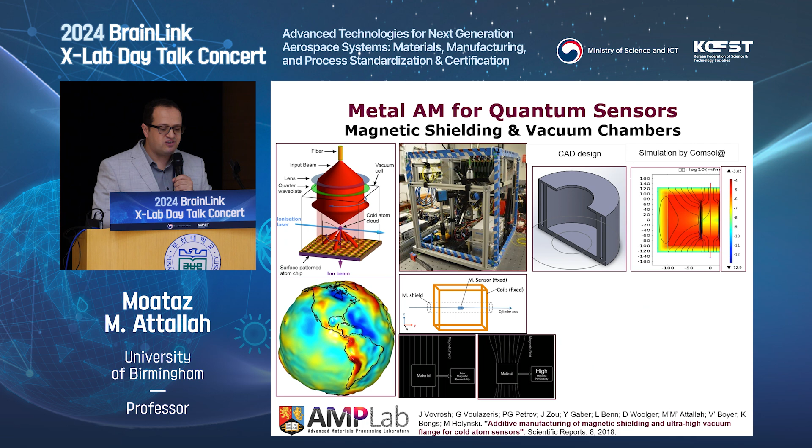With this being a gravity sensor, it needs to be very, very protected from any interaction from any magnetic fields around it. As a result, we started to use a material known as a soft magnet that will pull out all the magnetic field lines into it instead of actually allowing it to interfere with what's happening inside the sensor. So from a printing point of view, yes, you can print the material. We've spent some time qualifying it, we've obviously designed structures that are multi-walled, for instance. Printing was pretty fine.

It's a nickel iron alloy, so it's not too complicated to try to print it. Eventually we've done some tricks in the process to get it to work. We needed to tweak the crystallographic orientation of the material by printing it at a certain angle to allow us to get the maximum performance.

As a result, the parts we printed, when we talk about their shielding efficacy compared to the standard material, we are way above it. We're getting very high shielding capability, even more than the target, of course with some heat treatment and hipping to get the right performance. That reached the point where we are actually happy to deliver. It's basically no qualification required beyond the ability to deliver the magnetic performance, which it can.

It's a niche application, but it's a $7 billion industry because shielding is used in many sensitive components, in satellites, even on aeroplanes to protect them from electromagnetic interference. We've even expanded that now to other components. Many of the magnetic shields we print are used in medical imaging devices like MRI machines, into vacuum components, and other materials for that application.

Now this is in transition for the industry. Magnetic Shields is a company in the UK that works in this field, and they're now starting to use this technology and allow the spread of the application forward as well.

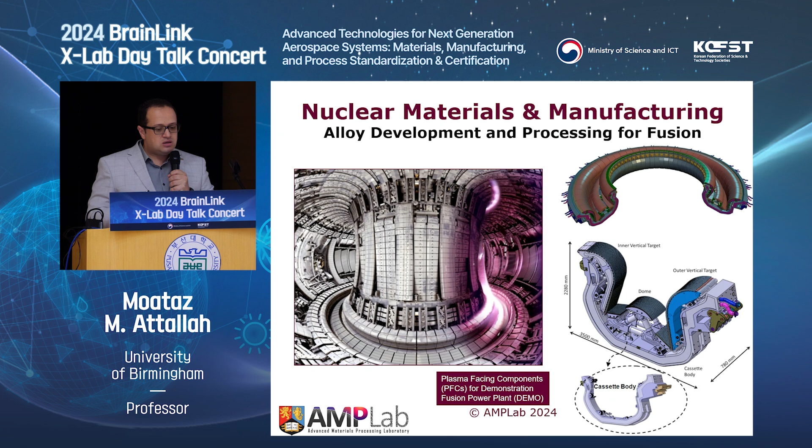These walls are typically made out of tungsten or vanadium or some steels. We need a material that can protect from the interaction with the plasma around it. The only material of choice is limited - it's tungsten. If you talk to people who do nuclear fusion, the first thing they show you is the periodic table, and they tell you, we don't want that, we don't want that, we don't want that. Eventually you get to the point where you're happy to live with tungsten or tantalum and chromium and vanadium - a very limited number of elements in the entire periodic table.

This is mainly because of the activation of these materials - you don't want to use something which is going to be active for over a thousand years. So you're happy to work with tungsten and tantalum, but plenty are in red, including things like oxygen, which will form at some point. This is potentially one reason why fusion remains 30 years away. Every now and then you have to find the material to deliver the required performance.

So when we tried to print it, of course, tungsten with laser powder bed fusion is highly susceptible to cracking. It will suck a lot of oxygen, so it always cracks. Even with the best practices, you're going to get some tiny little cracks into it, however hard we tried.

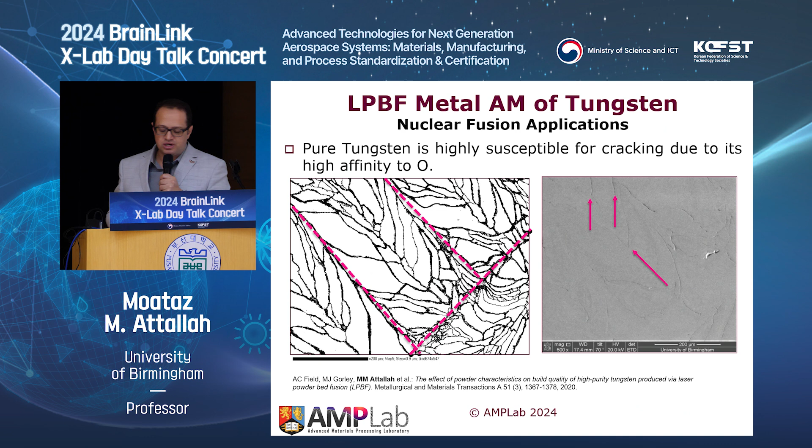Around the same time when we were doing the work for fusion, a company in Manchester came to me and said, Moataz, can you print this shape for us? This is an X-ray collimator - a device that gets X-rays to move in one direction. It basically sits there doing nothing, doesn't take any loads, doesn't take any other factors. We said, yeah, let's give it a shot.

We tried it, we printed it, and we tested it, and it did shield up to 88% of what solid tungsten would do, which for them was quite good - knowing that the only other alternative process is to laser machine it, and every time you get the hole wrong, you scrap the entire part. So it was not a bad idea to try to make it by additive manufacturing.

Eventually, it was commercialized - now it's being sold in the market, and the university signed a licensing agreement with the company. In their first year of sales, they sold I think around £250,000 worth of sales. My royalty for that was 150 British pounds. So you can see sometimes academia doesn't pay well when it comes to licensing technology.

But the key point is that, yes, it was cracked. There were some tiny little cracks, some micro cracks between the grains. But in a way, it does not compromise the performance. It does the job if you're using this for collimation or for microfocus radiotherapy.

More importantly for us as metallurgists, one thing we provided to the company was that if you want to print tungsten, you have two options. You can buy a very expensive powder like that, which will cost you around $200 a kilo. Or you can buy something which doesn't look very nice, which will cost you half the price, almost £100 a kilo. And if you're happy to live with something which has some cracks, which is not necessarily the strongest possible part, then it will do the job and deliver on the performance.

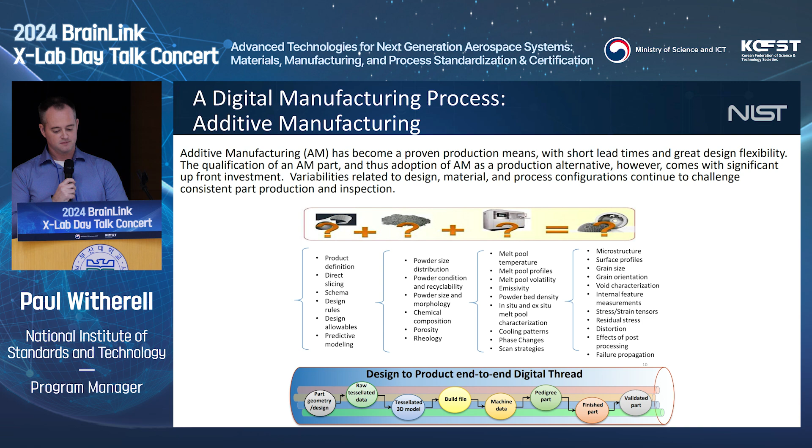What we have seen - you can make the argument that this has been a large contributor to the maturation of additive manufacturing as a production process over the past 15 years, 10 years, 5 years. We can see how it's drastically changed. Our machines that are 10 years old are very antiquated at this point, and our machines that are 5 years old are getting antiquated.

What's driven a lot of that technology development? A lot of it is driven by our ability to observe what's going on in the process, the ability to sensor these machines, and the ability to learn from what we're seeing in the process. We're seeing all these different types of data being generated across the additive manufacturing value chain, from the design phase to the planning phase to the fabrication phase, all the way to the inspection phase. We're using lots of different sensors, tools, and mechanisms for measuring our additive manufacturing parts and processes.

And we're creating lots of data. One of the early challenges people talked about is that we don't have enough data. Then we realize we have lots of data and it's all segregated - not handled the right way, not stored the right way, not curated the right way, not labeled the right way. And that's where we've seen this emergence of machine learning.

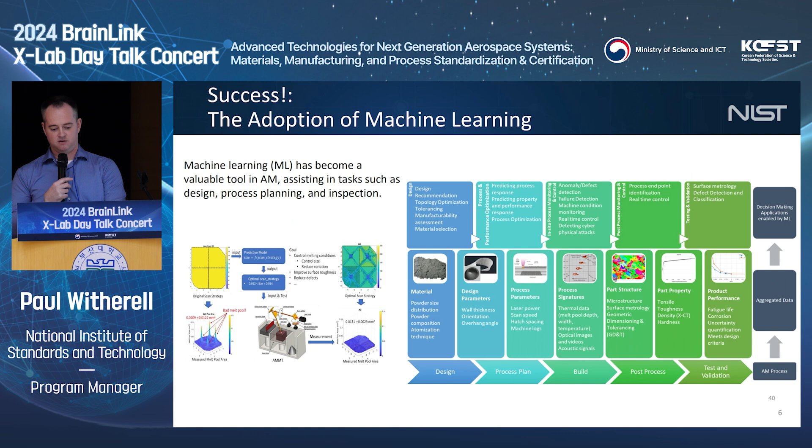So some of the challenges I just talked about, I think, is where we're hitting roadblocks in how we deploy machine learning. There's a lack of standard practice for handling data sets. Folks are generating and utilizing data, but developing solutions to fit their own data sets and needs, not necessarily for these ubiquitous data sets. There's an absence of common data structure.

A lot of times, what sensor you're using, who manufactured that sensor, determines how your data is created and stored. There's a lack of tools for organizing data in an easily accessible manner. Very often data is siloed—you have data generated off the machines, off the part, off the organization, and it's not always accessible when somebody needs it.

And of course, it's challenging to transfer learning between data sets. Even within an organization, you create parts and generate data for one material, one design, and we all know that doesn't necessarily work for the next material or next design. The way we use machine learning right now means we have to recalibrate, retrain, and redevelop our models to meet new applications in order to really take advantage of these algorithms.